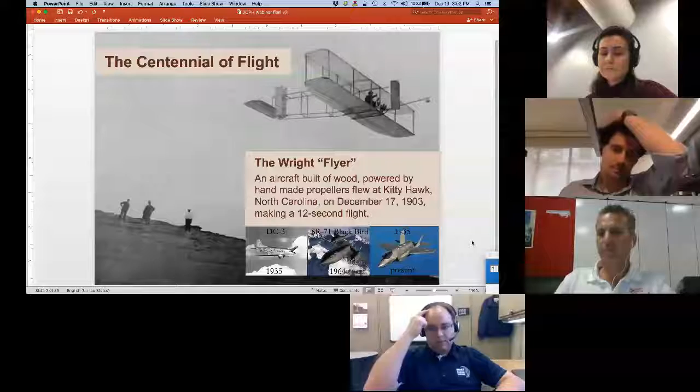Just a couple days ago, it was Wright Brothers Day, December 17th. And when they flew for 12 seconds, after 30 years, we had the DC-3. They're still running commercial flights. And then in another 30 years, we had the SR-71 Blackbird, an amazing plane that can fly many times the speed of sound. And now we have the F-35, which has technologies that make it look like the size of a bumblebee on radar, and composite technologies. So we want to develop technologies that can change the world and potentially make life quite a lot better.

Right now, Centennial Challenges has 4 challenges going on. CubeQuest is small satellite technologies that could potentially provide infrastructure for space exploration. Vascular Tissue Challenge could actually produce, grow human organs or tissue that could help people who are sick, as well as do experiments in space without expending an astronaut. We have the Space Robotics Challenge, which delves into automation, and a lot of what we're doing in the 3D Printed Habitat Challenge is in automation as well.

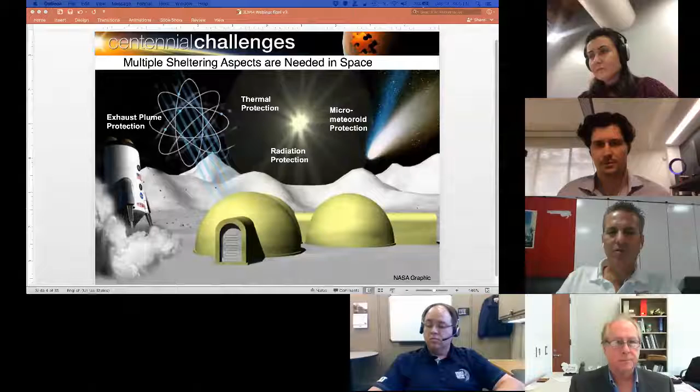We still have micrometeoroids coming in on the moon today. On Mars we have less because there's an atmosphere, a very light atmosphere, but micrometeoroids is certainly something we have to think about. And radiation protection is very important as well. To keep the human crew alive, we need some form of radiation protection from solar particle events and galactic cosmic rays. So that must be considered in the design.

Finally, there's something many people don't consider: when a rocket lands, the rocket engines have a lot of thrust, and this creates a blast ejecta where particles are entrained in the high velocity gases from the rocket engine, which can be as high as 2,000 meters per second. Think of sandblasting at an extreme velocity. So these are all aspects that need to be considered, but it all boils down to one thing: shelter. We need shelter in space for the human crew to survive and thrive. Next chart, please.

At NASA, we always try to quantify our goals and our results so that we can compare the results with the requirements and judge if a project has been successful or not. For a project we've had in-house at NASA in collaboration with the U.S. Army Corps of Engineers, we generated this set of key performance parameters. We basically have 4 KPPs, key performance parameters.

The first one is the construction material. The state of the art today is using water-based concrete and polymer concretes, using a technology sometimes referred to as contour crafting, which is essentially 3D printing with a large robotic gantry 3D printer. That's what is available today. The threshold value is the minimum criteria for success that we use for these kinds of projects.

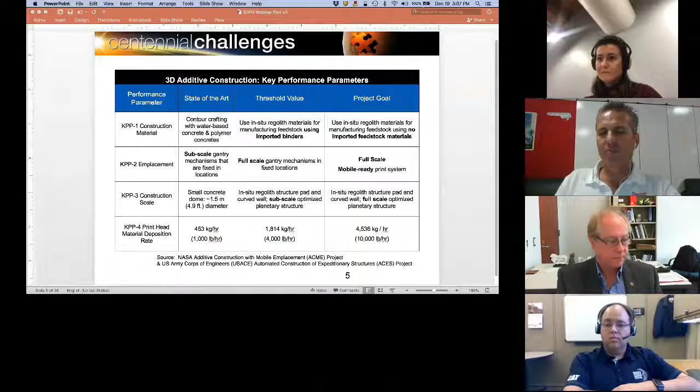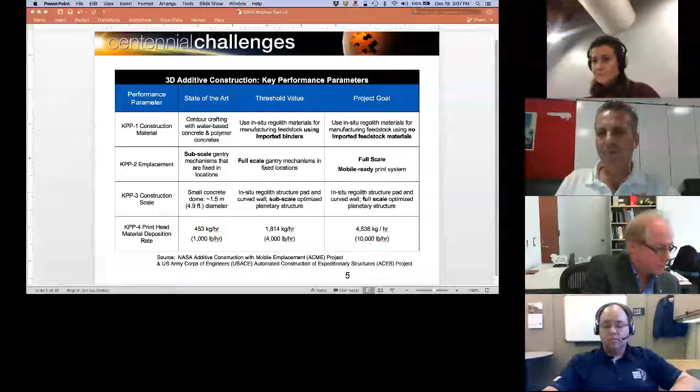We'd like to be able to do 3D printing using in situ regolith materials as the manufacturing feedstock, and we will accept imported binders. So you could bring a binder from Earth to Mars and use that, and that would be acceptable, but barely acceptable. Really our project goal is to have in situ regolith materials as feedstock, and these concrete-like materials we use in space should have no imported feedstock material. Everything should be indigenous material. If you read the rules, which we'll get into later, they do point you in that direction.

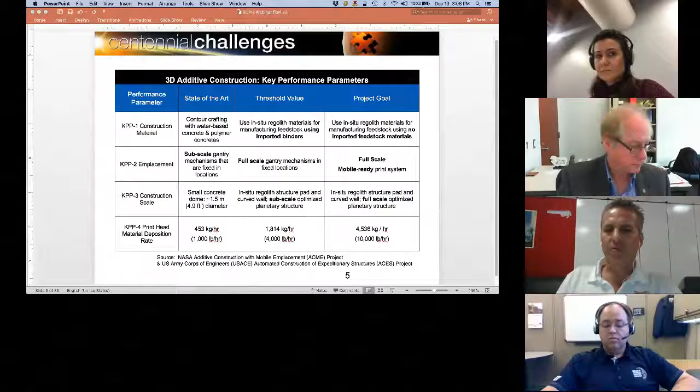Second KPP is emplacement. Today we make subscale small gantry mechanisms that are fixed in location. These are commercially available, but they're usually very big and heavy, and in some kind of warehouse or large hangar. What we'd like is a full-scale gantry mechanism. Large scale means something maybe 30 feet or longer in length, maybe 8 feet or wider in width, and maybe 8 feet or taller in height. So something of that scale is what we mean by full scale.

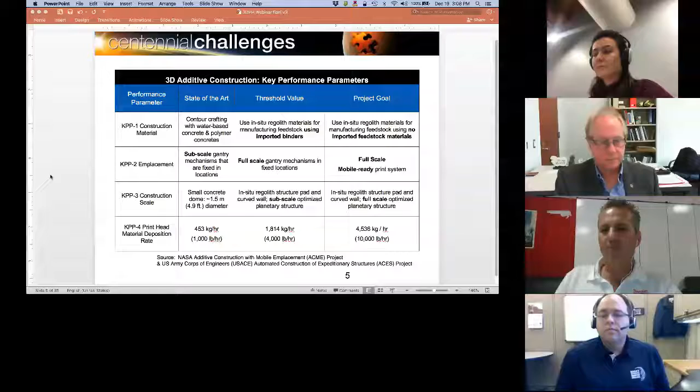Something big enough to 3D print a small house, about 500 square feet, or bigger. But really our project goal is to have these full-scale robotic emplacement systems, and they have to be mobile because we want to deploy them in the field, in space.

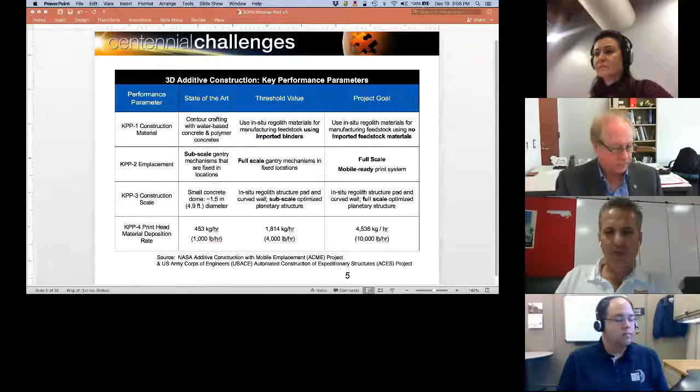Our third KPP is construction scale. Today, in phase 2 of this challenge, we've been able to demonstrate successfully that a small concrete dome can be 3D printed, 1.5 meter diameter. However, in the future, we'd like to make large-scale structures like landing pads or foundations, and our minimum criteria for success is a subscale optimized planetary structure, in other words, a scale model of a real habitat. But our final project goal is to have a real full-scale habitat, about 1,000 square feet, for 4 crew to live in on the surface of Mars.

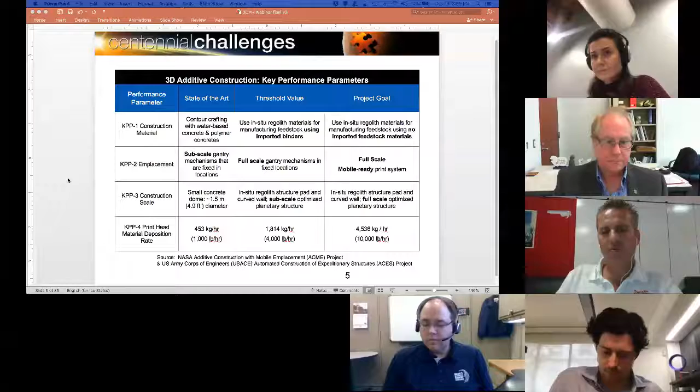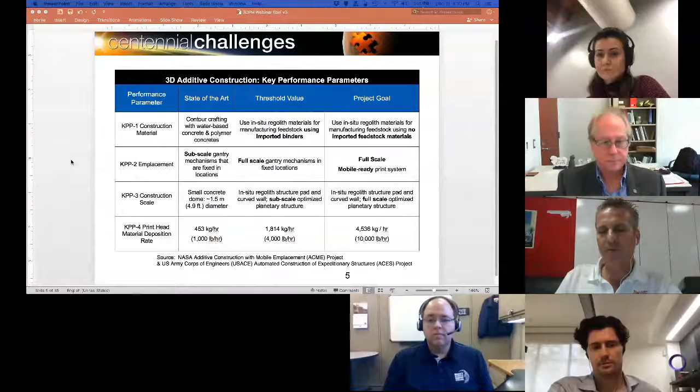Finally, our KPP number 4 is the printhead material deposition rate, and through various experiments inside NASA and at the Army Corps of Engineers, and benchmarking with what's commercially available in industry, we've established these criteria. What you can buy today can do about 1,000 pounds per hour. What we'd like to see, and some in-house experiments have confirmed this is very achievable, is 4,000 pounds per hour of a concrete-like material deposition rate. But ultimately, to make large structures quickly and efficiently, we need something like 10,000 pounds an hour of deposited material.

At NASA, we've decided to divide additive construction into 2 large categories. The first is 2D additive construction. This is a planar surface, think of a landing pad, a foundation, a parking lot, a dust-free zone, or a thermal wadi, which is an area that accumulates heat in the daytime and rejects it at nighttime. That's what we mean by 2D additive construction. Here are some pictures, examples of in-house work we've done at NASA showing how these 2D structures could be achieved, but they have never been done using this technology. So we're asking you to come up with ways of achieving two-dimensional structures made using additive construction methods.

The second large category we call 3D additive construction elements. That implies a volume. Ultimately, this would be a pressure vessel, a pressurized habitat in the vacuum of another planetary surface, providing shelter for the crew, equipment, and even equipment maintenance. Our ultimate goal is to make large 3D structures on another planetary surface using 100% indigenous materials, and the robotics would have to be autonomous or supervised autonomy, because the time delay of communications transmission between Earth and Mars, for example, is 20 minutes in each direction in the worst case, so you could have a 40-minute latency. That's far too much for teleoperation. So we really need technologies that are autonomous or semi-autonomous.

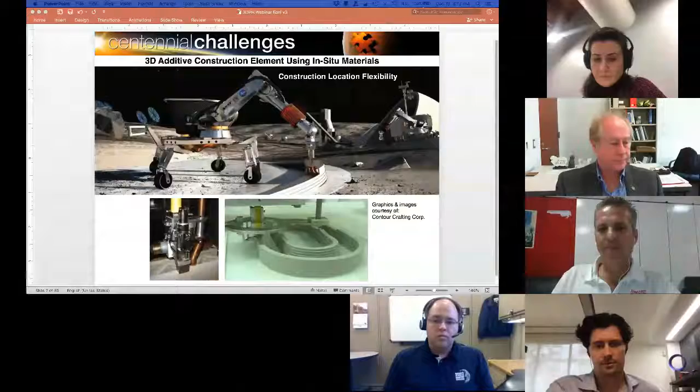At NASA, we have a series of technology roadmaps which are publicly available, and you can find these on the internet. From Technology Area 4, this roadmap is called the Robotics, Telerobotics, and Autonomous Systems Roadmap, and it's a peer-reviewed roadmap. We've identified the top technical challenges for robotics in general, but I think they apply very much to this challenge as well, in that when you develop a robotic system that's mobile and has to have the precision to place material exactly where you want it to form a 3D or 2D structure, it requires a certain level of technology. Here's a list, and I'm not going to go through each item in the interest of time, but these slides are available for your reference.

I'll point to things like fusing vision, tactile, and force control for manipulation, and also verification of autonomous systems. If you have a change, how do you verify that your autonomous system is still behaving how it should be behaving? Another big item is mobile manipulation that is safe for working with and near humans. Sometimes they call this co-robotics, where it's cooperative robotics, with humans working next to robots.

These are all things that need to be considered for future missions in space. So we'd really like you to think about the robotic technologies, and a big theme in this Centennial Challenge is automation of construction technologies. And I'll hand off to the next speaker, Mike Case.

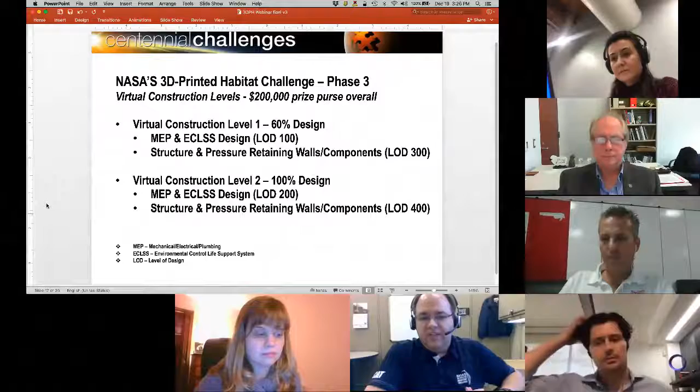As far as the physical construction levels are concerned, there's a total of $1.8 million available for those 3 levels. There's $400,000 available at level 1, $600,000 at level 2, and $800,000 to be split among the top 3 teams potentially at level 3. This is really trying to move the teams through different levels of complexity.

The first thing they do, among other tests and evaluations they'll have to do, which you'll hear more about later, is start with printing a foundation—that sort of 2-dimensional construction that Rob Mueller mentioned. From there, we'll be looking to determine if the teams can print something leak tight.

We'll have a hydrostatic testing phase where the teams will print what's loosely being called a bucket of water, so we can make sure the teams have that capability. And the final event will be a head-to-head competition to build that 1,000 square foot habitat at a 1/3 scale.

Just to note that at the head-to-head competition, the Caterpillar guys really put out the red carpet for everybody. Yeah, thank you—we had a really great time here in August with the teams that were able to be here with us in Illinois.

So I'll close out my section talking about the challenge structure and sponsors. This is a NASA Centennial Challenge, and as Tony Kim mentioned, Bradley University is the allied partner to execute the challenge. The teams, you'll note when you register and sign your team agreements, those are all between the teams or individuals and Bradley University.

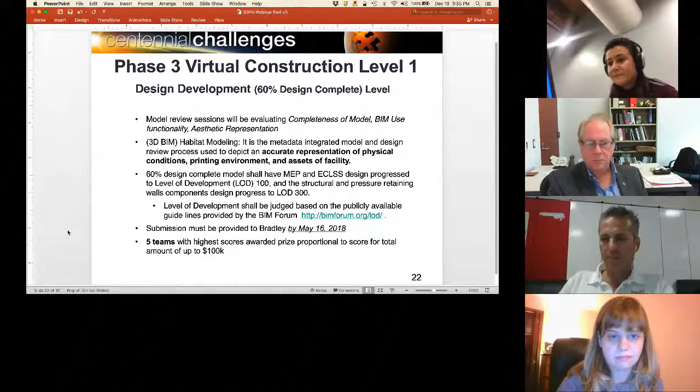In addition to the first level of construction, the virtual construction level, we're also looking for optional 4D BIM models related to construction sequencing, equipment flow, and the virtual mockup customized to the 3D printing construction process. The level of detail we're looking for at this time is 100% design complete.

In terms of modeling, MEP and environmental control and life support systems will be at LOD 200. The evaluation will extend to the realism of the 4D modeling review as well, and submissions will be submitted to Bradley by January 16, 2019. At this level, the 3 teams with the highest scores will be awarded up to $100,000.

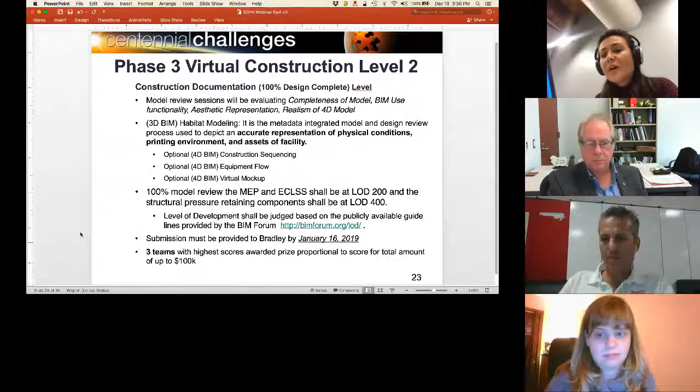In the next slide, you'll see how the BIM deliverables are scored. This will be done by the judging panels, and submittals submitted by competitors will be in an interoperable data format. The judges will evaluate these models in a free viewing environment. We're also asking competitors to submit, for the preliminary review, an MP4 format review of the BIM model, and a scale 3D print of the structure.

As our subject experts explained, automation from BIM to 3D print is highly encouraged. In detail, you can see the evaluation metrics.

One is the completeness of the 3D model through LODs for 3D evaluation, which comprises 25% of the scoring system. These are evaluated by the elements of LOD and the detail of system information. The second scoring criteria is BIM use functionality, comprising 50% of the scoring, evaluated by layout programming, layout efficiency, and 3D printing scalability.

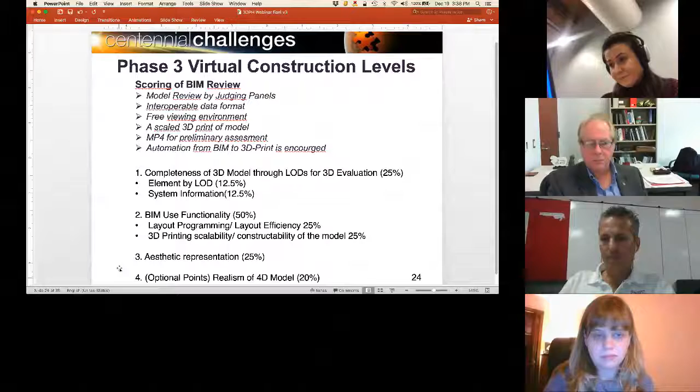So these are the virtual construction levels that I can summarize.

Thank you, Palin. Okay, now we are going to the actual construction levels. To describe those, Tracy Prater of NASA Marshall Space Flight Center will present that information. Tracy, it's all yours. Sure, thank you.

3D printing, we also refer to as additive manufacturing. Within the context of this competition, we define it as the process of depositing material layer by layer from a digital part file. This is already being demonstrated at somewhat of a large scale for construction, as we saw through the Phase 2 competition. The advantages of this technique for construction are that it removes some design constraints, reduces material waste, lets you put material only where it's needed, and reduces the time from art to part.

It's also accelerating materials development, which we also saw in the Phase 2 competition. With this competition, we'll be looking to further advance those technologies and also focus on use of in-situ materials as well.

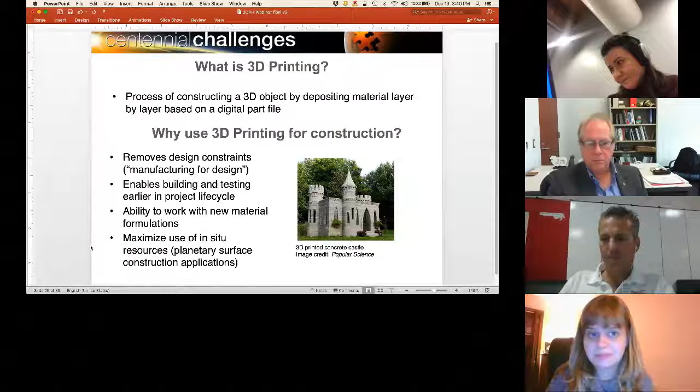NASA and other space agencies really recognize the potential of this class of technologies for space exploration.

When you go to a planetary surface, there's not going to be crew there. These are intended to be precursor missions where you'd have autonomous construction systems that would fabricate structures, particularly from local indigenous materials, to build up infrastructure prior to the arrival of crew. This also reduces our launch mass if we're able to capitalize on those in-situ resources, and that's part of the focus of this competition. There are also applications for disaster response and military field operations.

The vision of the Centennial Challenge competition is to really advance automated manufacturing and materials technology.

Phase 3, as Rob and others have talked about, is very focused on autonomy, but we're still trying to incentivize you to use indigenous materials and mission recyclables, which would otherwise be trash on a space mission. Another element to this is sustainable housing challenges, as the world experiences aggressive population growth in the next 100 years, and infrastructure repair and construction also tends to be very labor intensive in its current state.

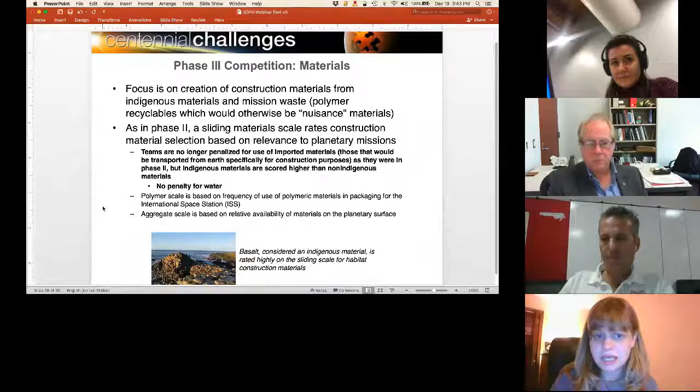However, as you'll see when we look at the sliding scale of materials, indigenous materials are scored more favorably. For polymers, the sliding scale is based on the frequency of the use of those materials in packaging for space station. The rock-based aggregate scale is based on relevance of those materials to a planetary surface, specifically Mars. So moving on to slide 5.

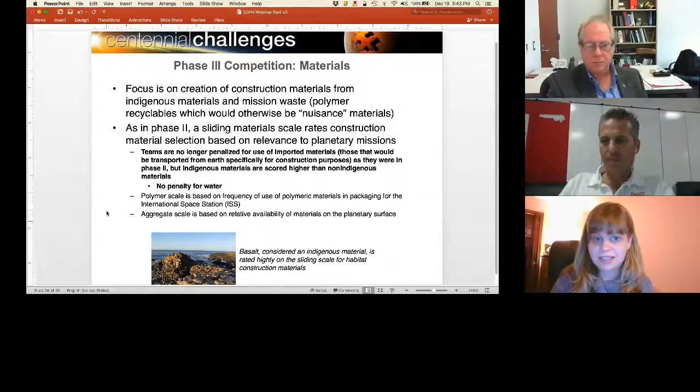I've changed it. It's a competition for materials. It's still phase 3 materials. Okay, slide 5 is the acronym sheet. Yes, okay good, I can see the slides.

So slide 5 is the acronym cheat sheet for the materials that you'll see on the sliding scale, for polymers and aggregate materials. And then slide 6 shows the sliding scale.

So again, there are several classes of materials: rock-based, polymers, additives, and binders. Within each class, materials are assigned a rating factor based on their relevance to planetary missions. Your material score is obtained by taking the 3DP factor assigned to each material and the amount of that material by weight present in the formulation, multiplying those and summing them all together.

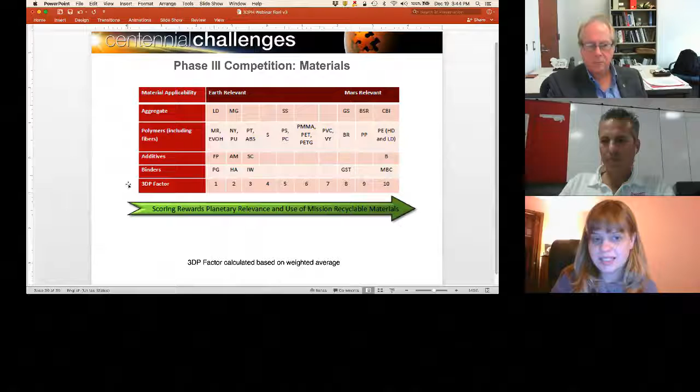Next chart, slide 7. So other notes on material scoring: you will need to provide video and document evidence of the material selection and the mixing process, and that's needed for the judging panel to be able to validate your mix and award the appropriate score to you.

And again, if you have a material that's not represented on that sliding scale, we just ask that you submit an inquiry to the judging panel and they will assign something specific to your particular material.

And so for phase 3, within each construction level - there are 3 construction levels - 100 points of 1,100 will be allocated to material selection. So there's somewhat less of a focus on materials and what particular materials you select than there was in phase 2, but it's still an important element of the competition.

We're still trying to incentivize you to use indigenous materials and trash recyclables, which is part of the vision of this competition. Okay, so slide 8, we'll start walking through the construction levels.

So construction level 1 is somewhat of a 2D construction portion of the competition. We're asking you to print a foundation that's 2 meters by 3 meters by 100 millimeters thick. And so that will be evaluated for both smoothness and levelness per ACI 117, which is an American Concrete Institute standard that governs tolerances for concrete construction.

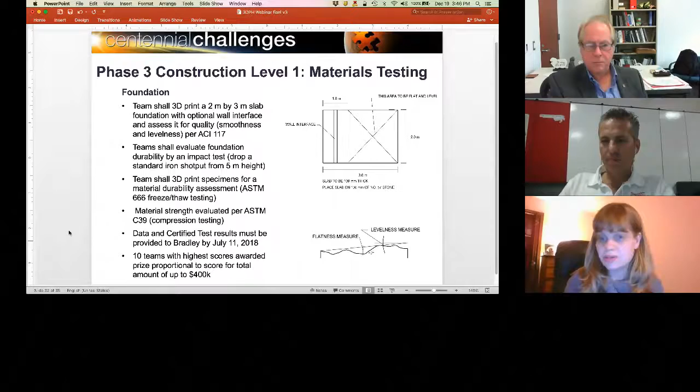So slide 9 goes more into level 2. That is focused on printing a habitat element, so a walled structure with an optional roof, and then subjecting it to a hydrostatic leak test - filling the structure to 2 different levels and then documenting the rate of drop in the water level to measure leakage over a certain period of time.

And there are also some penetrations for this part of the competition that can be designed by the teams, and then also assessing the accuracy of the placement of those elements. One important note here is that if you're competing and you don't substantially change your material between level 1 and level 2, or between level 2 and level 3, you don't have to resubmit the results of specifically the freeze-thaw test or the compression test.

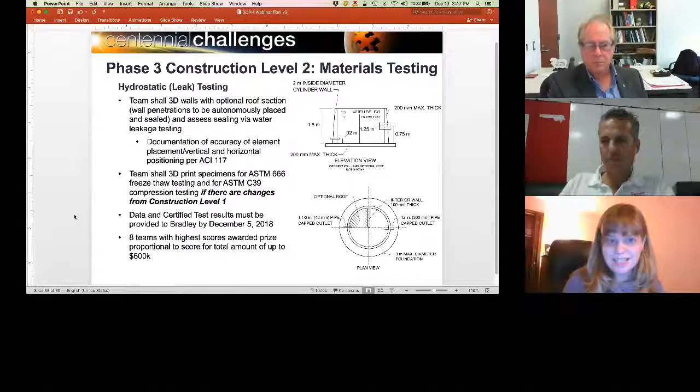Okay, so slide 10 should go through level 3 and the head-to-head competition. So we'll be inviting 8 teams to the head-to-head, a maximum of 8, and you have to build a 3rd scale habitat on site.

And so the test that would be performed on site would be a smoke test to measure leakage from your structure, impact testing via a drop test, and then crush testing to look at the ultimate strength of your material.

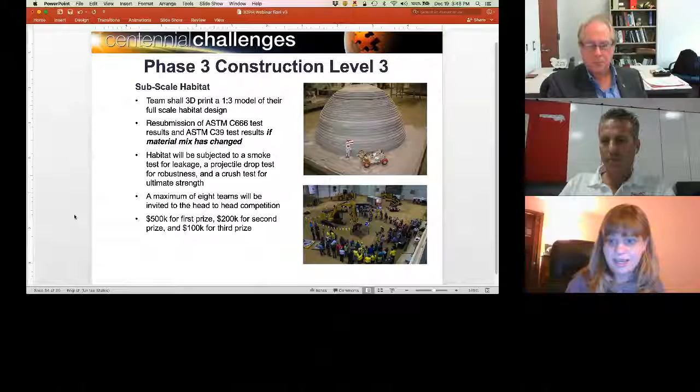And so that's it. Lots more detail on the construction levels of the competition, specific material tests, and how materials are scored can be found in the rules document. But if you have questions about those as you enter the competition, we ask that you submit them and we will publish those in the form of an FAQ. Thank you, guys. Thank you, Tracy.